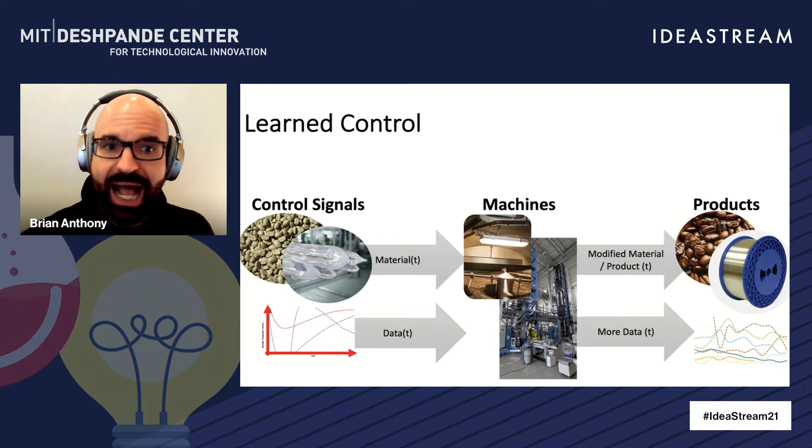Learned control, what is it? In manufacturing, you have control signals and materials that are going into a machine. And that machine is taking material in and putting material out, the product, final product, or work in progress, and also generating a lot of data.

Whether we're talking about making coffee that you're enjoying for your morning brew, whether it be a light roast or a dark roast or something in between, or you're making optical fiber or fiber for your clothing, which if you look at it in cross section has different mechanical, electrical, and optical properties. All of these products, coffee, fiber, additive manufacturing, there's a machine making a product.

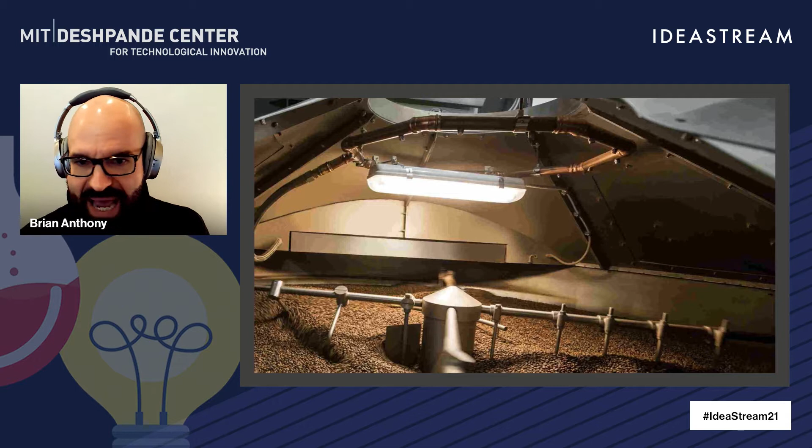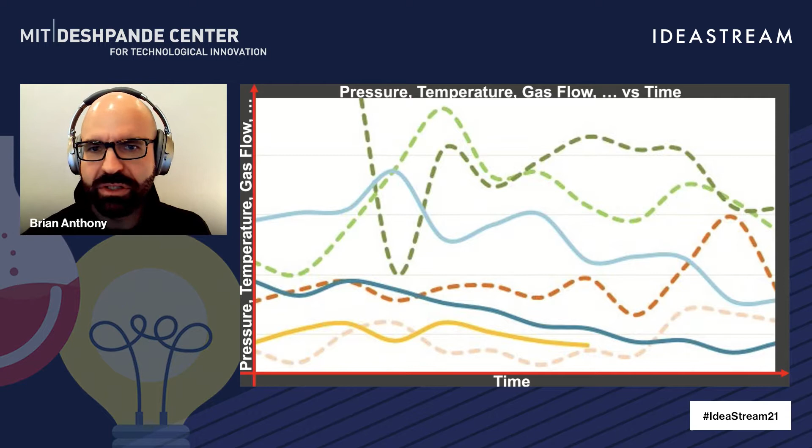Those machines, here a coffee roaster, or a fiber extruding device, have data and control signals associated with it. Pressures and temperatures and gas flow as a function of time, force and velocity as a function of time.

So what is machine learning? What does data analytics have to do with this? In the manufacturing environment, at the heart of maintaining quality and achieving a certain performance is real-time feedback control, where you have a set of things that you want to maintain, either their absolute controlled value over time as a steady state, or some value that's changing.

And in the context of fiber, we are controlling the preform speed of the glass ingot that's being put into a furnace. We're controlling the furnace temperature. We're controlling the tension with which we're pulling the fiber, and we ultimately control the fiber diameter or other mechanical aspects of the fiber.

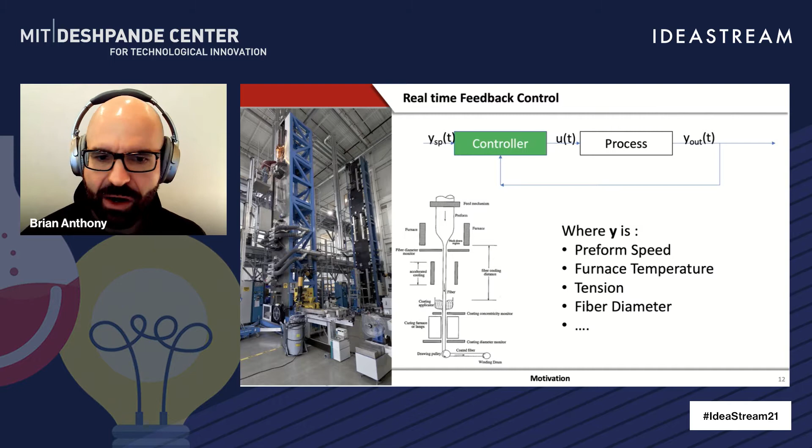For all of these parameters, all these settings, the general framework is we have some type of process. Before that process are control signals that drive that process. And those control signals are determined by a thing called a controller. And that controller takes as input what it is that we want, our set point, and what it is that we're getting, making decisions based on either the error or the derivative of the error or the integral of the error between what we want and what we get.

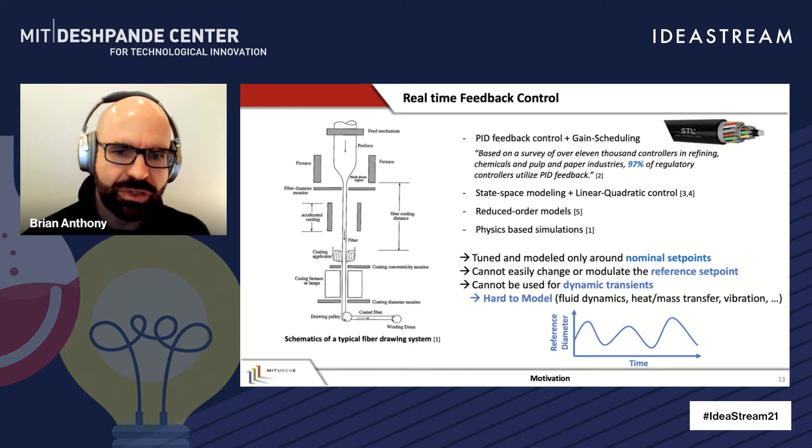Now, many processes in the manufacturing environment use very classical techniques, such as proportional integral derivative control, or slightly more complex techniques, such as state space modeling or linear quadratic control, or do a little bit of modeling of the physics. Now, in all of these classical and heavily used control strategies, they're very much tuned and optimized to a particular and nominal set point.

They work very well when we're trying to produce a particular roast of coffee, a particular color, or trying to achieve a particular nominal diameter of our optical fiber. It's very hard for these controllers in general to then be reconfigured rapidly and changed to operate at a new set point to produce fiber, say, with modulated diameter, or a larger diameter, or coffee with different tastes and colors.

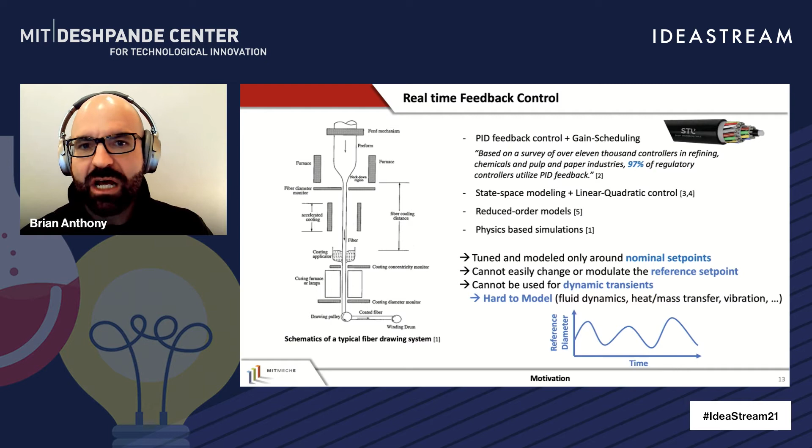So it's hard on the factory floor to take these real-time feedback control systems and adjust them. It's hard to model the systems that they're controlling. It's hard to model fluid dynamics, heat and mass transfer, and vibration, except operating around the steady state of operation, which is where these control strategies work very well.

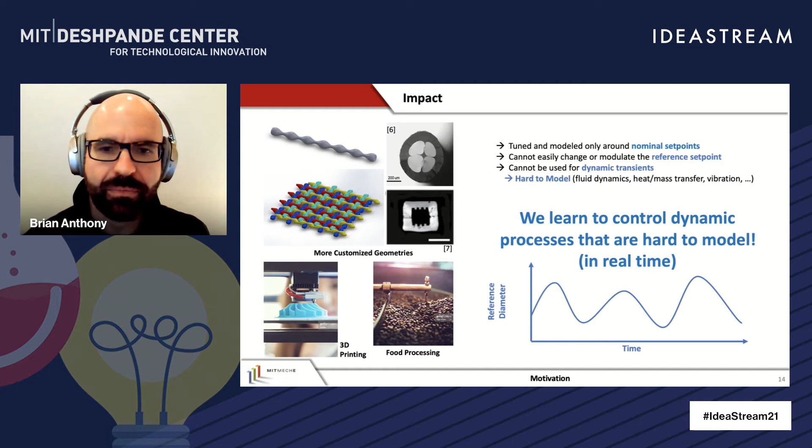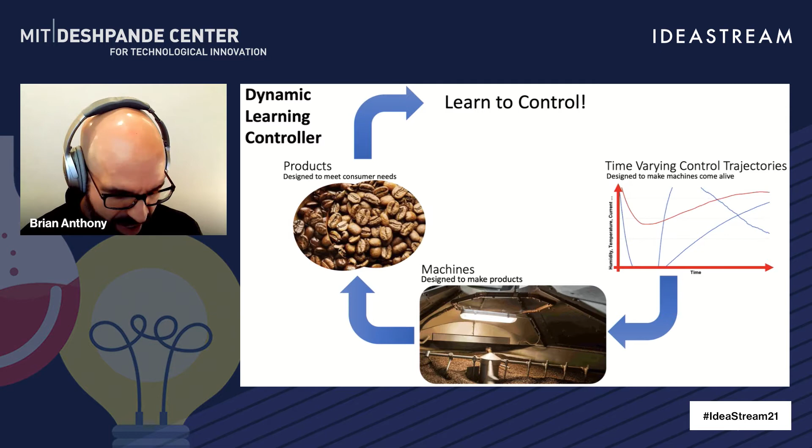Where we are innovating is learning to control dynamic processes that are otherwise hard to model in real time. The impact of our work is we fit into the existing control strategy of life. Time varying signals driving a machine, making a product, and we learn to control. We learn the physics of operation, we learn to optimize the process, we learn to make new variants of the

process. In the context of machine learning, the architecture that we use is an agent, an actor-critic feedback loop, where our action is the control signal, our environment is the manufacturing process, our state and reward is the sensor reading, and our agent is the controller.

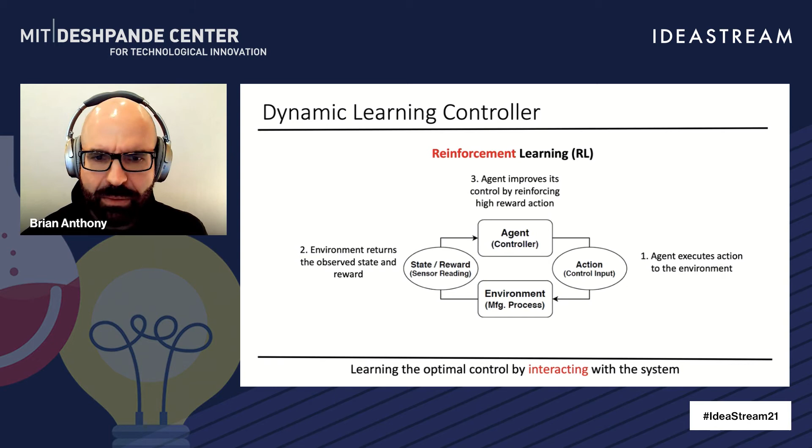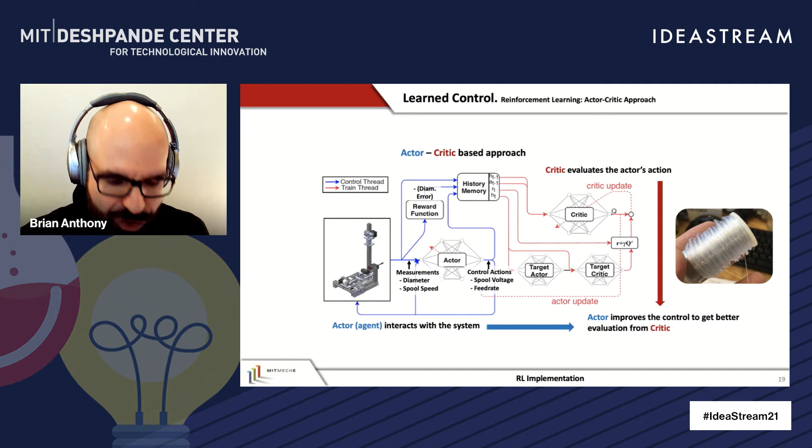Putting a little bit more context to that, a little more graphical, paying attention to the big picture here. We have a machine that has a product that is producing here the fiber. In this architecture of this actor-critic approach, if we drill into the actor, it is nothing more than our control system. The actor is your conventional feedback controller where you have a system here, the extruder, the spool, the plant that's doing the thermal heating of the fiber, and we have the thing called the DRL agent, the deep reinforcement agent, that is controlling in real time.

But sitting on top of that is all of the additional machine learning infrastructure that you would typically do offline. As we're doing the real-time control, we record our history of data. And as we observe that history, we steadily learn about the physics, we steadily learn about the process.

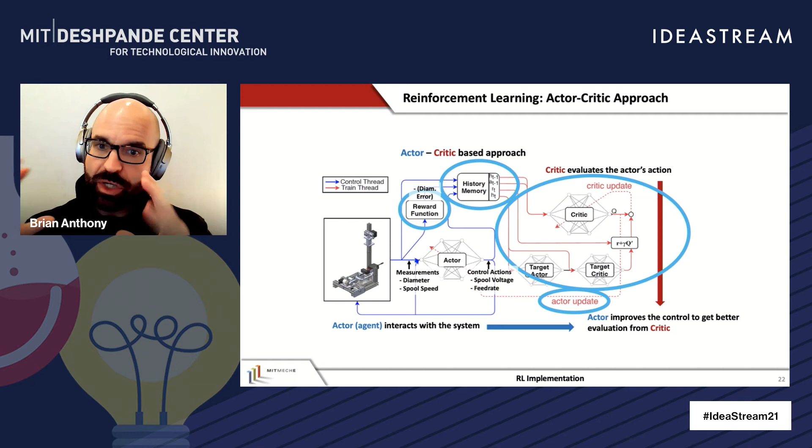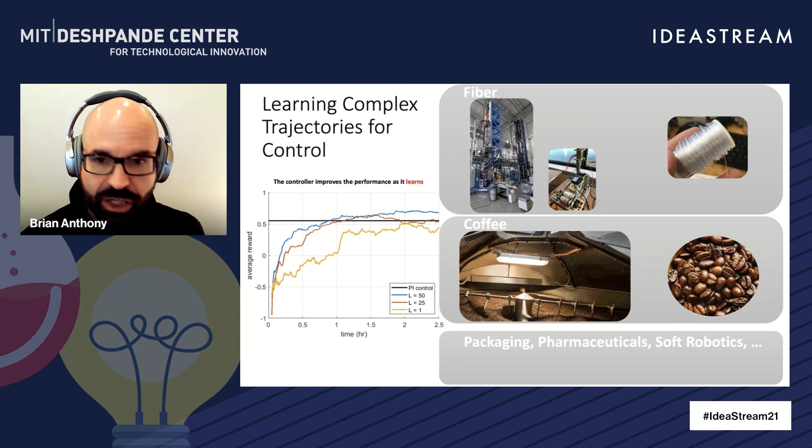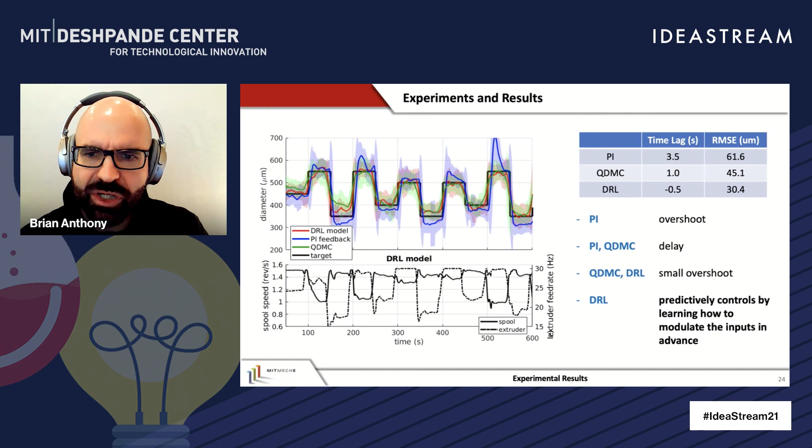The experiments here, a little bit on fiber. What's really interesting here is the summary that our deep reinforcement learning approach is beating the benchmarks of PI, QDMC, and other classical control strategies. But if you think of fiber extruding for a second, it's a material in and material out. It's a mass flow problem. And our learning approach learned here how to simultaneously push and pull the material that's coming out and the material that's going in to very rapidly respond to step change command inputs on modulating the fiber diameter.

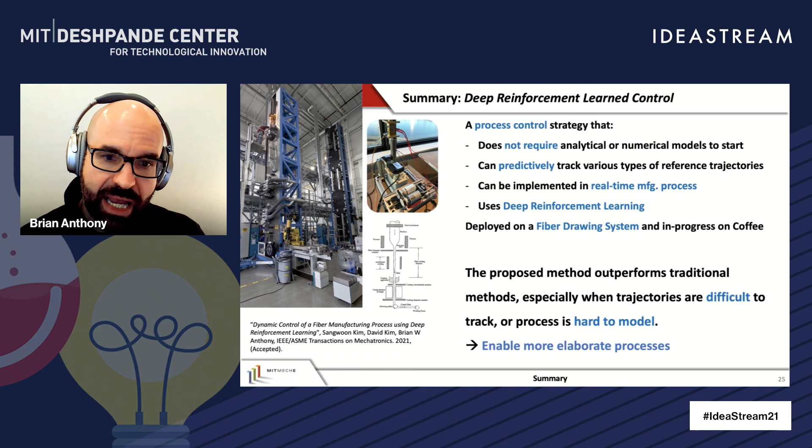So the system that we've developed, it's a control strategy that doesn't require analytical or numerical models to start, but it learns them. It can predictively, after learning those models, predict what new control strategies should be put in place to optimize performance. We're able to implement this in real time. It uses the deep reinforcement learning architecture, but at the edge and in real time. We've deployed it on a fiber drawing system and in progress in coffee roasting. And we look forward to applying this to other manufacturing processes that are difficult to track and hard to model.